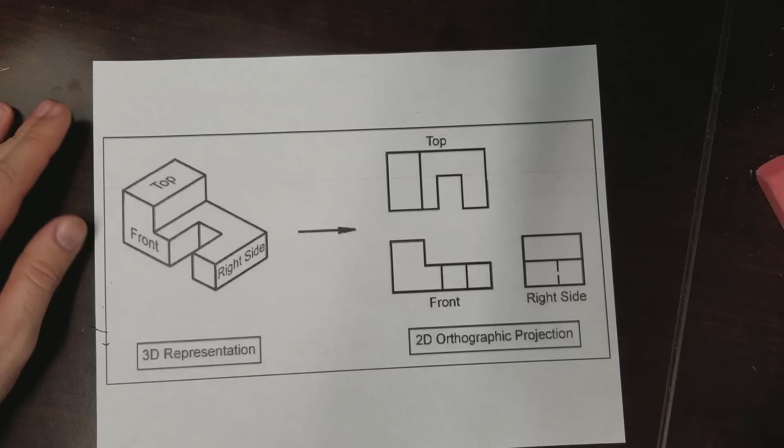Okay guys, I'm going to talk with you a little bit about orthographic projections. Sounds complicated, but it's really not. So we've been learning our isometric sketches here, right? We need the orthographic projection to help us see shapes that aren't there, and also to help us detail our measurements in a way that's a lot more legible than if we were just to do it off here, which I will teach you.

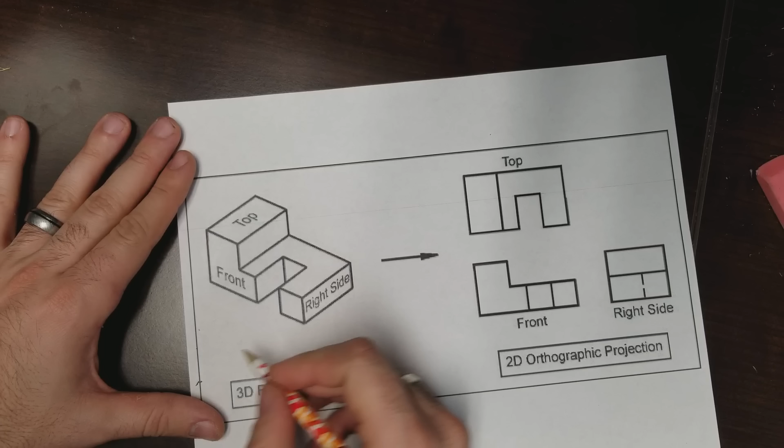I haven't yet. So the first thing we're going to be doing for this assignment is pretty straightforward: you've got a top, front, and right side. The top is if you're looking straight down on your object. The front is if you're looking over here from the left. The right is if you're looking over here from the right side.

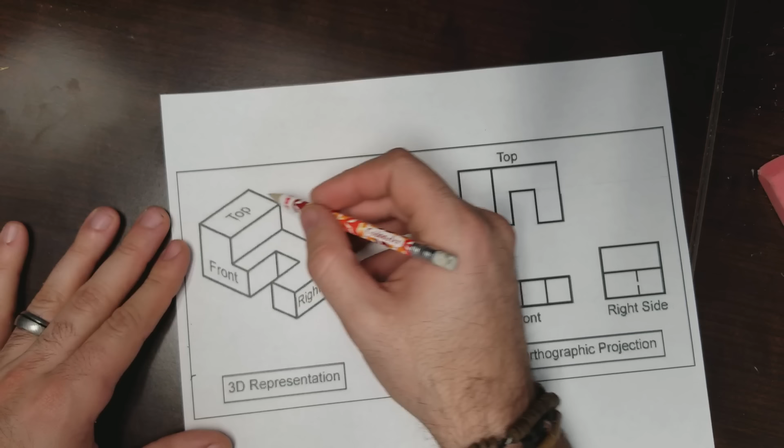So what I want you to do is shade these separate colors. We'll leave one white. Let's go ahead and leave the top white. So this top is going to stay white. You can choose different colors if you want on yours. I'm going to do the front. I'm going to do a light gray.

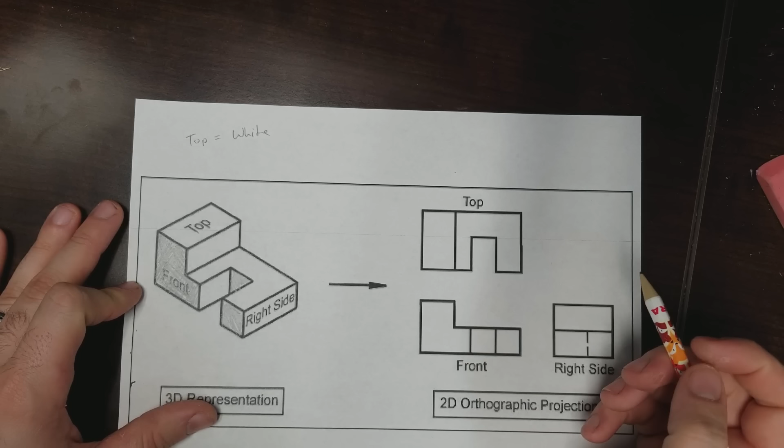Okay, this one, and this one. And if you look, imagine if I just held that piece to the side.

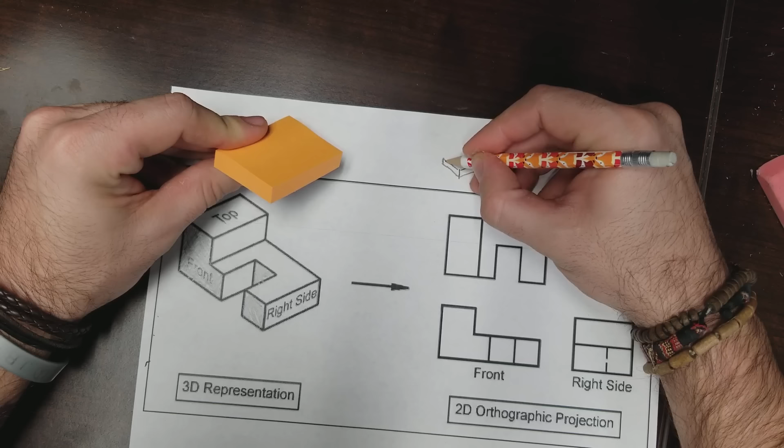I'm just going to use this little sticky note here. Let's pretend I'm going to do a real quick sketch of it. Let's pretend this little sticky note -- the front would be this part right here, okay? And so if we shaded this in light gray, we'd be shading in this part right here.

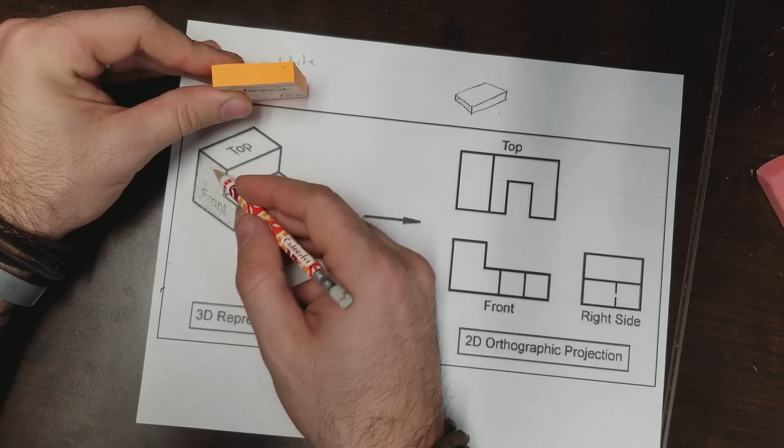And so I want you to think about how it would look from that side. See how this shape right here corresponds to these blocks that I colored in. If you were to just move that shape and look at it from the side, that's exactly what it would look like. Okay, so the top's already white, so let's do the right side.

We're going to do a dark color. So that would be, if we were holding it like this, this part. This is the right side, okay? And we think about what it looks like over here. So we're going to do that a dark color.

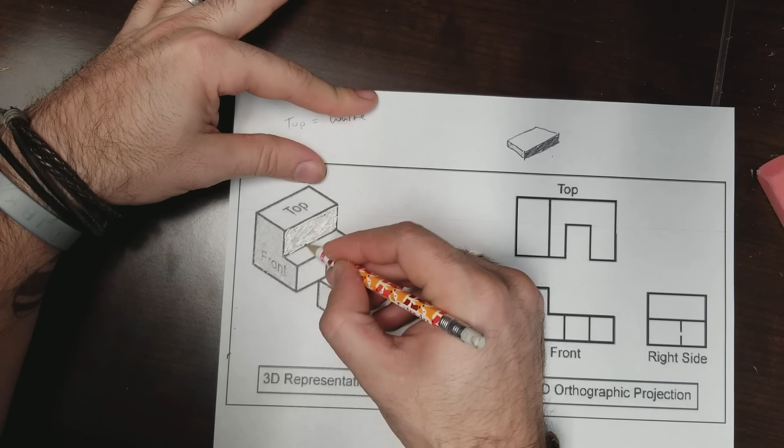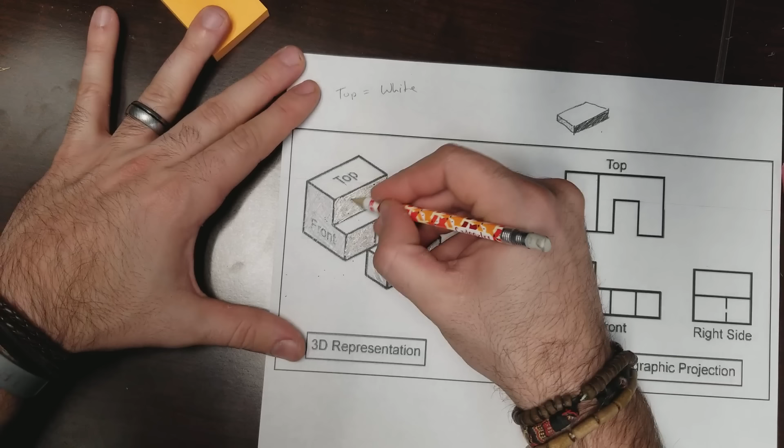Okay, so you can kind of now see the different colors. Okay, I know it's kind of glary. Let's see right there, you can see it a little better.

Okay, so now we're going to color these the corresponding color. The top's white, so we're just going to leave it white. So the top would be this part if you're looking straight down on it. If you're looking straight down on this part, you see that little gap right there. You can see it right there.

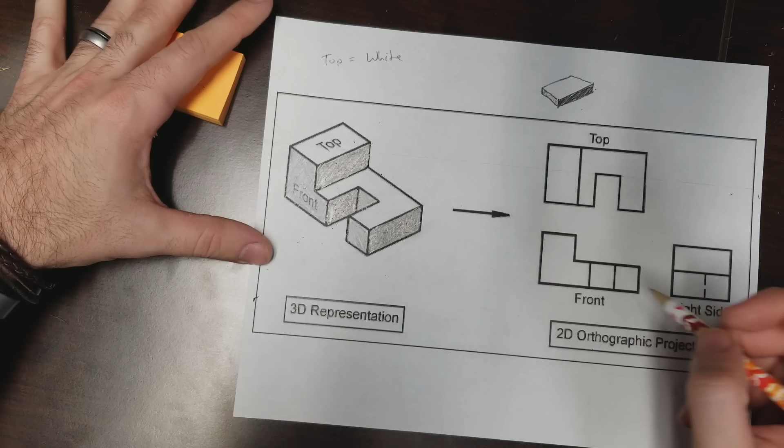The front is the light gray, so we're going to color it light gray. And you can see that these lines correspond to the actual lines in the object. So look, if I held it like this, you see a line here that represents that edge. This line represents this edge.

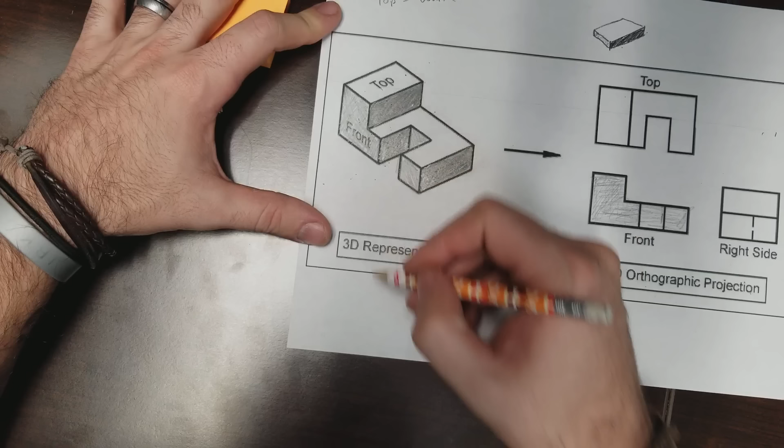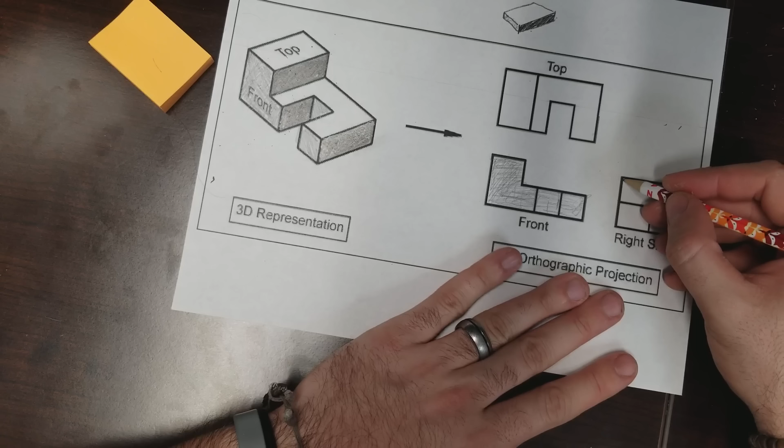Now with the right side, if you were to hold this object to the side, notice how there's this line right here you can't see. You have to use a hidden line, which is what that little dashed line is right there. But you see this edge right here, that represents the difference between this and this. So you know that there's an edge there. So we're going to color that in dark.

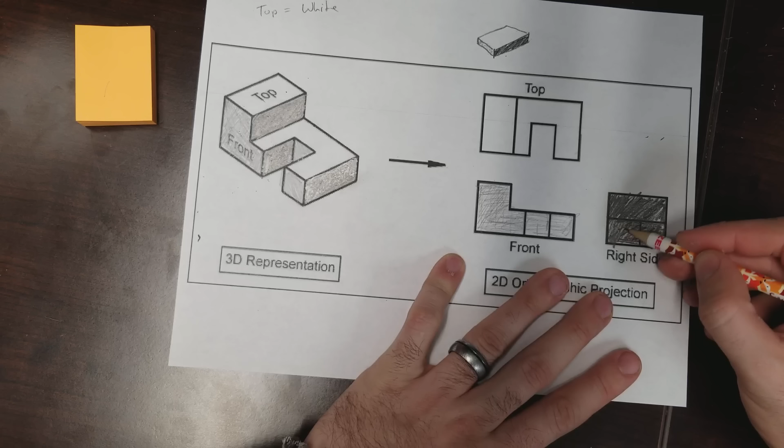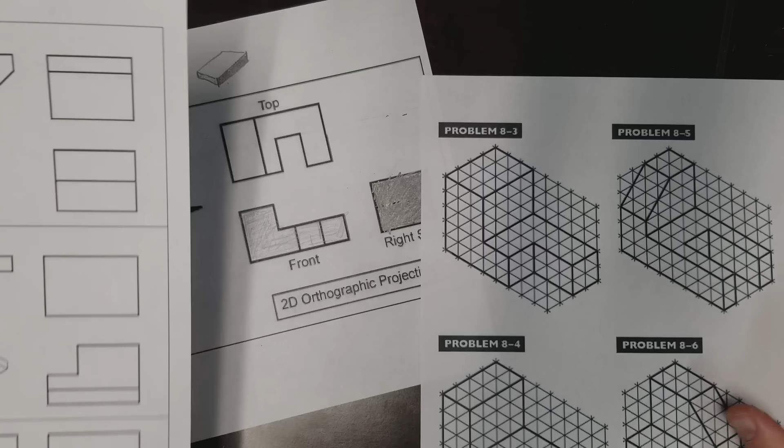Okay, so for the first part of this activity, you're going to either have some sheet like this or like this, and it's going to tell you to fill in like the top or something. So the top would be -- if you can see this shape like this -- would be the top.

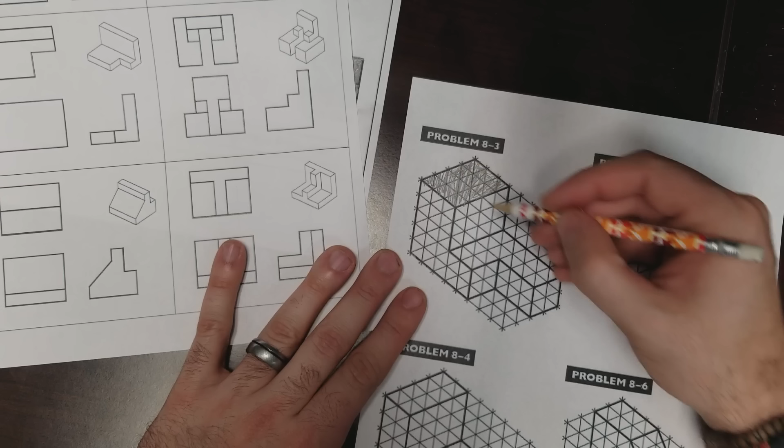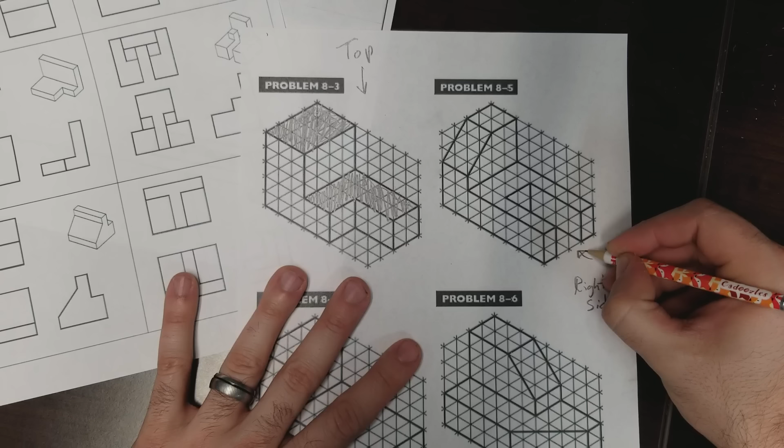Okay, or if it asks you to do it from the right side. That would be all this.

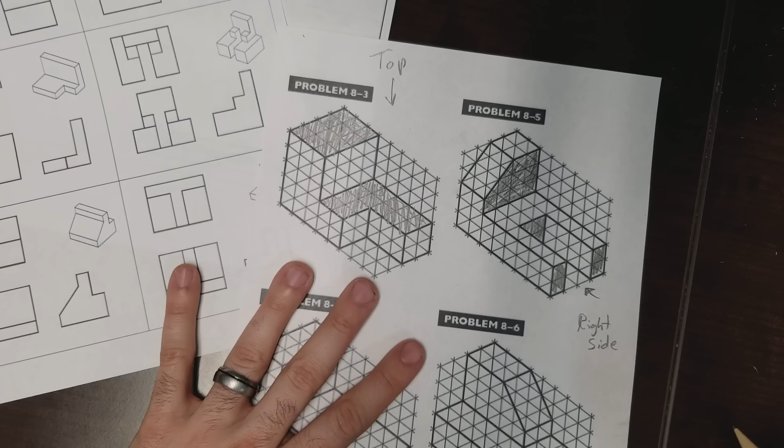Okay, if it asks you to do the front, be from the side.

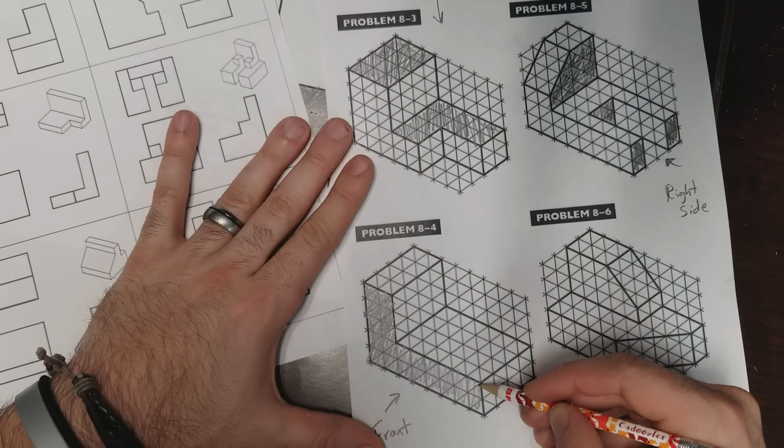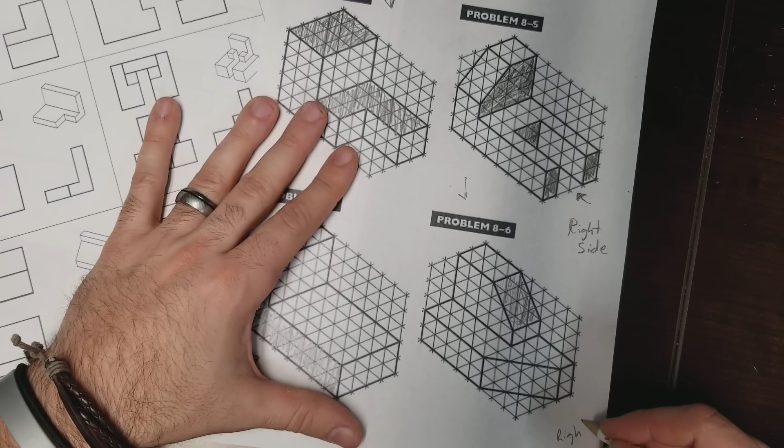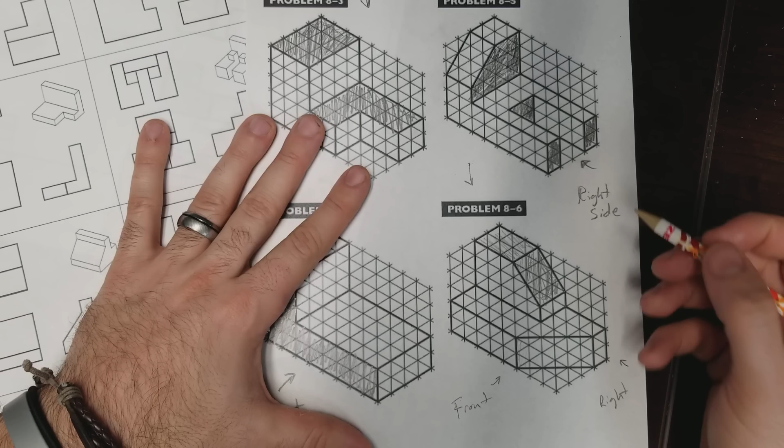Okay, now on things like, let's say we're doing the top here. Even though this is slanted, it's both part of the top and it'll be part of the right side because it's slanted. Now you'll have to count, well, these go over by 2 on each of these. 1, 2, 1, 2. But the top would -- that little slant would be part of the top and the right side. Just like this slant would be part of the front and the right side. They share it, okay?

So watch those angles. Remember that they're both, okay? You just distinguish them by adding that line in the view.

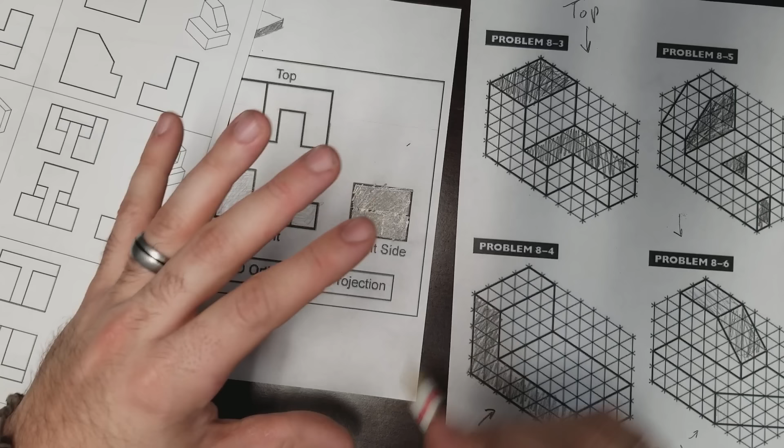But before we start actually drawing these out, I just want you to practice picking out what part's what. Think about if you held the shape at an angle where all you could see was just the front, what would that shape look like, okay? And then I'll give you a little worksheet, work through it, and then we'll start in the next section.